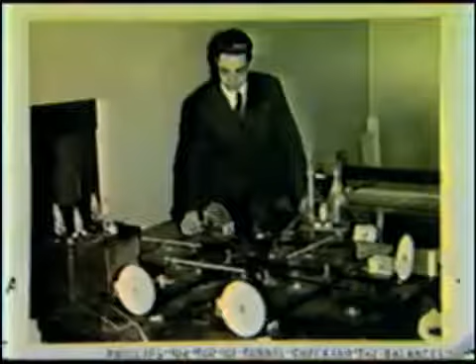The first slide shows me sitting on top of a wind tunnel that was built in conjunction with the Jordan Marsh Junior Aviation League. This is when I was 21 and before I came to Langley. This was a rather unusual wind tunnel. It was intended for testing indoor models, had a test section 5 feet in diameter and an airspeed range of 3 to 5 feet per second.

Now, I'm going to discuss the research by covering 4 different problems that we worked on, and these problems are not necessarily the ones that yielded the most important research results, but I think they serve to illustrate some of the different approaches that are used in solving these problems.

Now, the first work, the case of the unexpected instability, was work that was conducted starting about 1942.

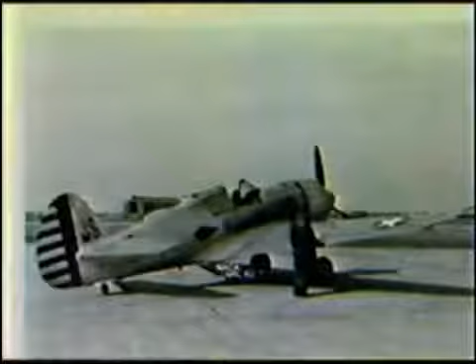The next slide shows this surface installed on a Curtiss XP-42 airplane. You can see the experimental tail surface there. The next slide, please. Now this shows a close-up. You can see, in addition to the tail here, the tab on the trailing edge. This slide shows a plan view of the airplane showing the comparison of the tail with the original tail.

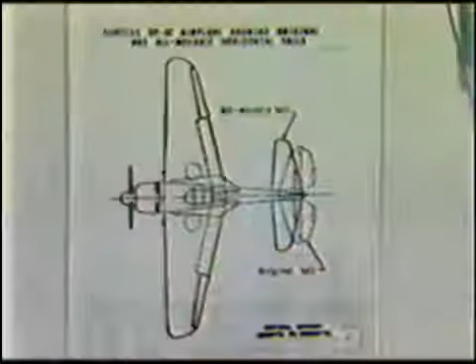Now, this tail was suggested by Bob Gilruth and had a somewhat different concept from the idea suggested by Jones. At that time, fighter airplanes were running into problems in high-speed dives because they would reach speeds where compressibility effects were encountered on the wing, and shock waves would form, which would cause the flow to separate on the wing. Usually this resulted in a large loss of downwash at the tail, and as a result, a large nose-down pitching moment on the airplane. And because these airplanes in dives were at very high dynamic pressure, sometimes the pilot was unable to pull hard enough on the control stick to recover from the dive.

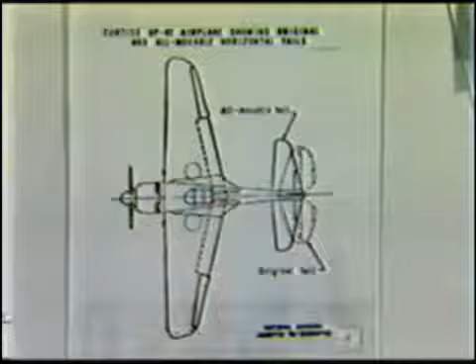So the idea of this tail was to reduce the aerodynamic hinge moments on the surface practically to zero, so that the problem of applying enough control effort would not be encountered. Now, the principle of operation of the tail is shown on this slide.

The tail was pivoted about a point close to the aerodynamic center so that the forces required to deflect it would be small in any case. Then the tail was controlled through a device we call a spring tab, which is this linkage.

This slide shows how this would work. If you pull on the control stick, that first deflects the tab. Then, as the tail moves in response to the aerodynamic forces, the tab again becomes lined up with the surface.

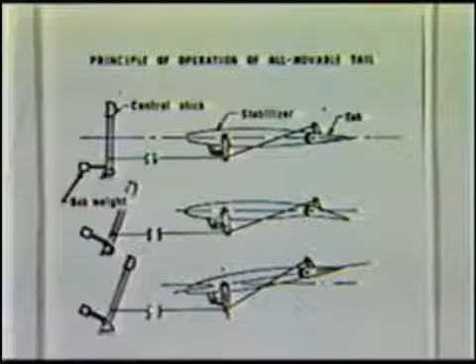Also a spring is inserted between the control linkage and the main part of the tail. The spring is weak enough, however, so that the aerodynamic forces have the main effect in moving the tail. The main purpose of the spring is so the pilot can move the tail around by moving his stick when the airplane is sitting on the ground.

Now, since the spring tab arrangement would reduce the control forces practically to zero, a feel device in the form of a bob weight on the control stick was added. This would give a constant force per G when the pilot made pull-ups and turns, and we had found from previous handling qualities research that this was a desirable type of control feel.

Our chief test pilot, Mel Gough, took this airplane out and made some high-speed taxi runs and short hops into the air. He came back and very vehemently said that this airplane was completely uncontrollable, and under no conditions would he fly it until we made some improvements.

So this was somewhat of a puzzle. We thought that the tail would work reasonably well. We thought the aerodynamic center would be at the quarter chord point, and the tail was pivoted at the 24% chord point so as to give it a small amount of stability.

Well, after thinking about this without coming up with any solutions, I decided to build a model. This wasn't a model of the XP-42 by any means, just a glider model with a rectangular fuselage. The wing was taken from an old rubber-powered model that I had available. However, the tail and the tab linkages and so forth were quite well reproduced. Since I'd had a lot of experience building models, I could build a model like this in about a week.

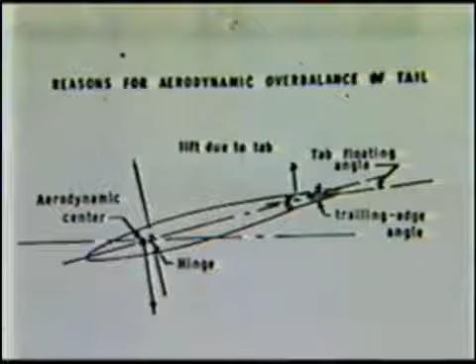First, although we usually consider that the aerodynamic center on an airfoil is at the quarter chord point, it's true that on a finite aspect ratio surface, the aerodynamic center is further forward. Perhaps even some aeronautical engineers today don't realize this.

The other point is that this surface had a finite trailing edge angle. Many airfoils are designed with a cusp-type trailing edge, but when the structural engineer sees this, he fills in the surface back here with lines tangent to the upper and lower surfaces in order to get more thickness for structural strength back at the trailing edge. This had been done on this airfoil.

Now, Bob Jones had previously put out a report which showed that you could reduce the hinge moments on a control surface by using a beveled trailing edge. It was generally known at that time that the trailing edge angle did affect the hinge moments on the control surface. That also occurred on the all-movable tail, and since we had this finite trailing edge angle, that further tended to move the aerodynamic center forward.

Finally, as you can see, when the tail is deflected, the tab tends to float with the relative wind, and the aerodynamic forces generated tend to further deflect the surface. So the combination of these three effects evidently combined to make our tail quite unstable.

Well, this was corrected by gluing strips along the trailing edge. These were strips of wood about a quarter of an inch high on the upper and lower surfaces, right at the trailing edge. This was a fairly common procedure in those days for increasing the hinge moments of a control surface. When this was done, the surface was found to be sufficiently stable so the pilot was able to continue the flight research. Now, the handling qualities were still not completely satisfactory, so it might be of interest to discuss what we learned from these studies of all-movable tails.

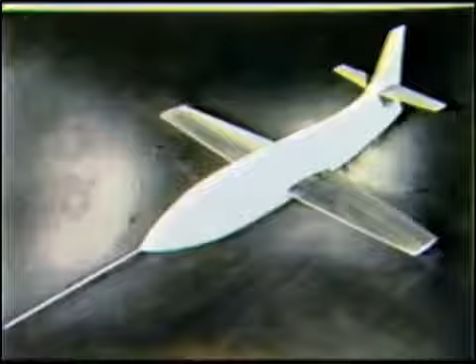Also, a simple longitudinal autopilot was incorporated because we didn't know what pitching moments would be encountered at transonic speeds. This autopilot was simply an accelerometer sensing normal acceleration with a couple of contacts on it. When the acceleration exceeded a range of 4/10 to 8/10 g, these contacts would operate and actuate a slow-moving trim motor, which would run the elevator in the direction to bring the acceleration back into the desired range.

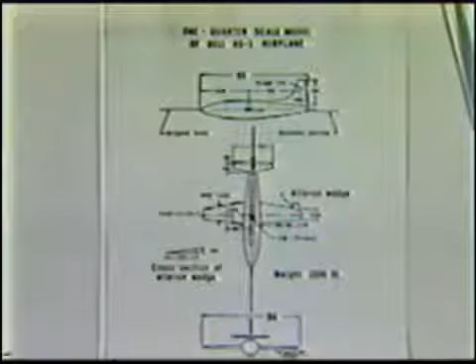Now the next slide shows a 3-view drawing of the model. As you can see, it had... want to move it up, please? Could you move it up, please? Yeah. It had a span of 84 inches, or 7 feet, and the weight was 1,300 pounds. Pretty heavy model for that size.

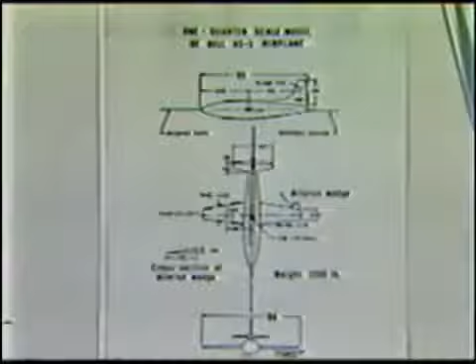Now, when I fly a model airplane, I frequently sight along the trailing edge of the wing to make sure it's not warped before I launch it. Nobody would have suspected that this wing would be warped, since it was machined from solid steel to an accuracy of 0.02 of an inch. However, as a matter of habit, I looked along the trailing edge of the wing, and it was quite apparent to me that this wing was warped, with one side up about 1/4 of an inch compared to the other.

So some more accurate measurements were made and showed that sure enough it was warped. Some small wedges were placed on the trailing edge of the wing, similar to ailerons, to attempt to offset the twist, or the built-in twist of the wing. We did not want the model to roll too fast during the dive because we were studying longitudinal characteristics.

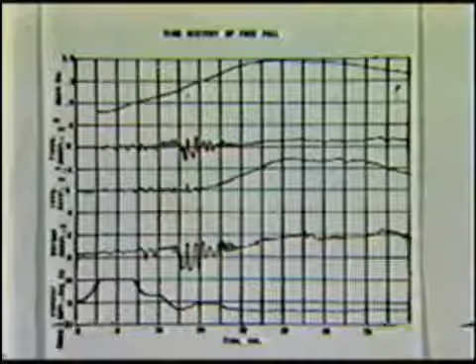Well, the model was dropped, and the time history of the results are shown on the next slide. You can see that the acceleration, the Mach number starts off at about 5/10 and builds up to very nearly 1, and then decreases a little bit towards the end of the dive. This shows the transverse acceleration, the longitudinal acceleration, which shows the buildup of drag at transonic speeds, the normal acceleration, and the elevator angle.

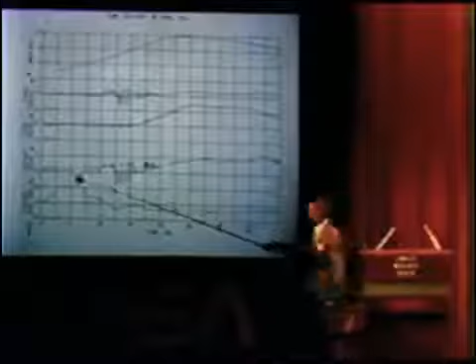Now the acceleration started off less than 4/10 of a g, and as a result, the elevator, as you can see, ran up to its full up deflection, which was 10 degrees. When the acceleration exceeded 8/10 of a g, the elevator started moving down again, as was intended, and it maintained the acceleration in the desired range fairly well.

Towards the end of the drop, however, you can see the elevator was full down. Its maximum downward deflection was 4 degrees, but this was not enough to keep the g from building up, and it built up to about 2g.

Now, a rather unusual thing happened also. We did not measure the rolling velocity, but the people tracking the model with a phototheodolite could see it rolling by the flashing of light on the wings. However, when we got to about this point, near the maximum Mach number, the model stopped rolling, and due to the 2g acceleration, it performed a gradual pullout. So it flew away far from the desired impact point at Plum Tree Island, and flew way over to the swamps of Poquoson and crashed down there.

Now, it's not considered very good to have a 1,300-pound model at Mach 1 crashing down in a populated area.

However, apparently no one knew about this, no one was hurt, so far as I know, no attempt was ever made to recover the model, and it's probably still sitting 20 feet deep in the mud somewhere around the swamps of Poquoson. Very little was ever said about this.

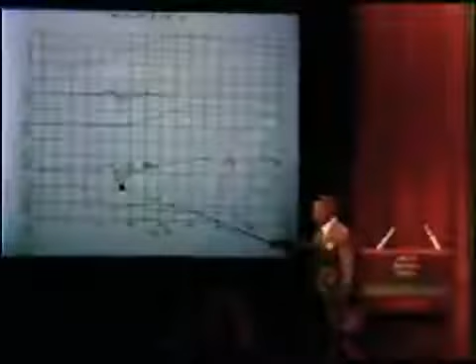Well, I felt, because of the fact that the model was rolling and also the very heavy weight of the model, there were probably some inertial effects involved. So I started to think about how to investigate this problem.

Now, I must admit that it never occurred to me that the conventional airplane stability equations could be used to study this problem. Probably the reason for this was that when I studied stability at MIT, the professor first introduced the longitudinal equations and then the lateral equations, and these were studied as separate problems, whereas in this case we had a combination of longitudinal and lateral motion.

At MIT, however, I had a course called Introduction to Aeronautical Dynamics by Professor Rauscher, in which he went back to first principles and introduced us to a set of equations called Euler's dynamical equations for the rotation of a rigid body. And these equations are shown on this slide.

Now, since these equations applied to combine the longitudinal and lateral motions, I thought this would be a good way to start investigating the problem.

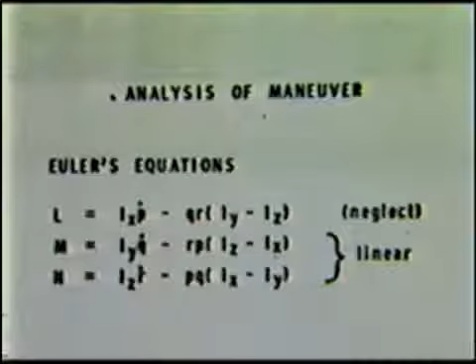Now, I felt that in this maneuver, the airplane was rolling at approximately a constant rate, so the rolling acceleration would be zero. Also, Q and R would be small, so the product would be negligible, and so this entire first equation could be neglected.

The second two equations, we see this product RP and PQ involving the rolling velocity. However, if the rolling velocity is constant, then the equations become linear, involving Q and R. Now, this was fine because I knew how to solve linear equations.

The other point you can see is that the first two terms are simply the equations of a body doing a single degree of freedom. The pitching moment equation represents an oscillation in pitch, and this one represents a yawing oscillation. The effect of these terms is to couple those two oscillations.

So the way I approached this problem was to consider a vehicle having an oscillation in pitch and an oscillation in yaw, which were coupled by those coupling terms, hence the term inertial coupling that was applied to this work.

Well, this seems like a straightforward approach. However, I did run into some conceptual difficulties. It appeared that when the pitching and yawing oscillations were studied, it was probably more convenient to use fixed axes, whereas Euler's equations apply to angular velocities about body axes.

Omega sub theta is defined as the ratio of the pitch natural frequency to the rolling velocity, or the rolling frequency. Similarly, omega sub psi is the ratio of the yaw frequency to the roll frequency.

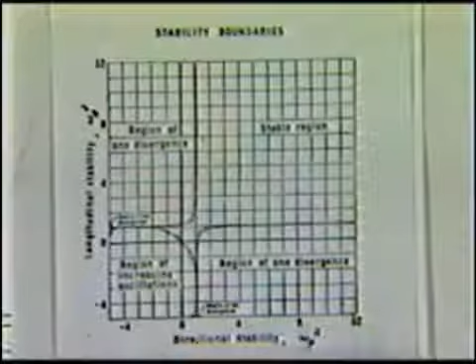Normally, if an airplane would have some pitch and yaw frequency, we would be located somewhere in this chart. And as the rolling velocity increases, since the rolling velocity is in the denominator, you would follow a set of conditions approaching the origin.

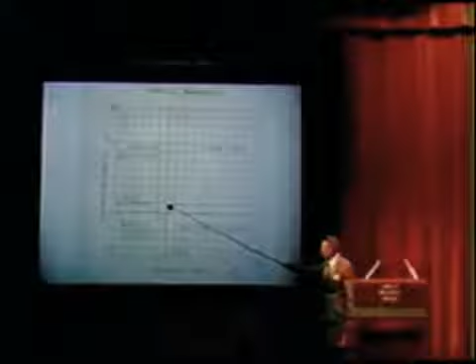Now, if the pitch and yaw frequencies are approximately equal, the airplane, or the conditions, would go on this path, which would remain in the stable region all the way up to infinite rolling velocity.

However, if the pitch and yaw frequencies were different, then it's possible that the conditions would cross over the boundary into this region of divergence.

It appeared that that was what happened on the X1 model. That is, we knew in that case that the directional stability was very much larger than the longitudinal stability, so the conditions would be somewhere in this region, and as the rolling velocity increased, it would pass over into this divergent region.

Evidently, when that happened, the airplane simply diverged until it reached the stall, and then the stability increased to the point that it was batted back in the other direction, resulting in an oscillation of several cycles, as you saw.

Well, when I wrote a report on this, I pointed out that although this problem had not been encountered on full-scale airplanes up to that point, it would very likely be encountered on fighter airplanes, which were then on the drawing boards, because these airplanes had most of their weight in the fuselages and short wingspan, high rolling velocities—all conditions which would tend to lead to this problem.

And as you heard, this was actually encountered, and as a result, this report got quite a bit of attention.

Well, I'd next like to go to what I'd call the case of the unknown concept, which is gust alleviation. Let's see, I really didn't mean to put that slide up yet, but that's okay.

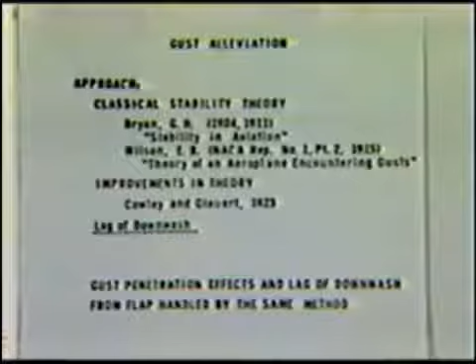Autopilots had been pretty well perfected during World War II, and at that time, pitch dampers and yaw dampers were just coming into use. However, these were conceptually so simple, it hardly seemed worthwhile to do any research on them.

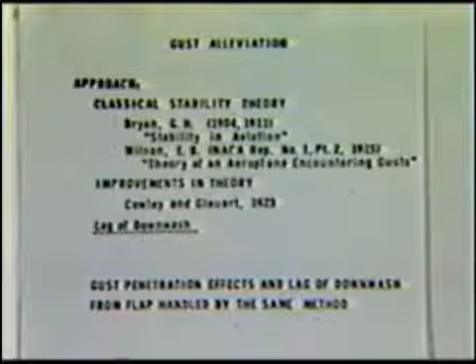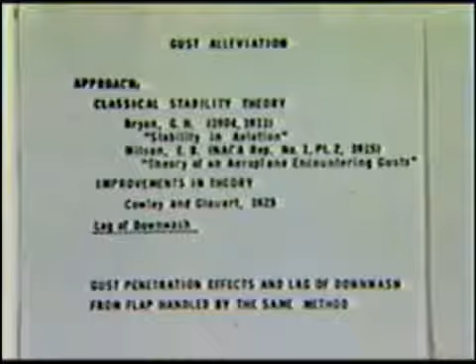That left about three fields where we thought there would be worthwhile research. One was the study of guided missiles. The other was what we call command control systems, where the pilot's input is applied through the automatic control system.

This is what we sometimes call today active control systems. And finally, the subject of gust alleviation.

Now, the guided missile work had been pretty much ruled out because Dr. Dryden, when he was director, said that NACA shouldn't work on guided missiles unless they were requested by the military services.

That left the command control systems and gust alleviation, and we did research in both those areas. I'd like to talk about the gust alleviation because I was more directly involved with that.

Now, at that point, a number of attempts had been made to build gust-alleviated airplanes, but these had all been notably unsuccessful. And I concluded the reason for this was that these were all attempts to build airplanes by inventors who had not bothered to do any theoretical analysis of their systems before they were tried.

And as a result, I thought the best approach to this problem would be to first make a theoretical analysis.

Now, this was something I could do quite easily on the basis of my background, because I was involved primarily with the longitudinal equations.

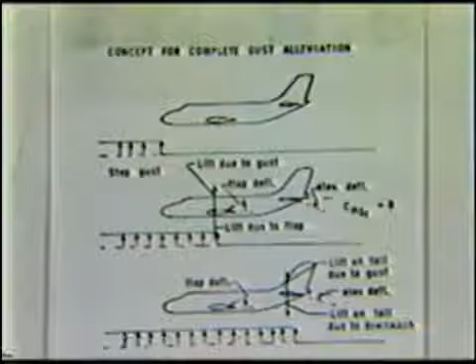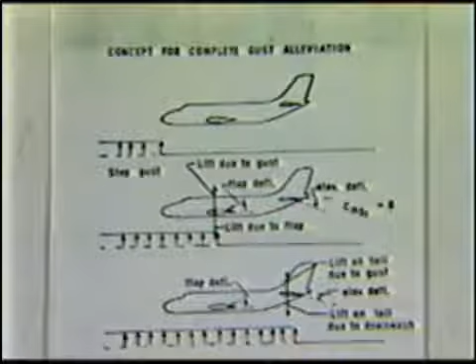Now, this was in terms of a mathematical formula, but after thinking about this for a while, I could see that it actually represented a very simple physical concept. What's going on is, assume we have an airplane approaching a step gust. When the gust hits the wing, it's necessary to move the flap up to produce a lift just opposite to the lift generated by the gust on the wing. However, when you do this, it causes a pitching moment on the airplane. This pitching moment can be offset by simultaneously deflecting the elevator, so the pitching moment is also zero.

Then when the gust reaches the tail, that produces a lift on the tail. Flap and elevator are still deflected. In order to offset that lift on the tail, one possibility is that the downwash from the flap would just offset that lift on the tail, since it would reach there the same instant as the gust. Now, this is somewhat unfortunate in that you can see that when the flaps are deflected up, it usually produces an upwash, whereas what we need is a downwash.

However, we actually considered various possibilities and decided to build an airplane in which this principle would be utilized. Another way to do it would be to then subsequently deflect the elevator an additional amount, to offset this lift on the tail due to the gust. I'll explain in a minute why that was not done.

Now, the next slide shows the airplane that we modified to include a gust alleviation system. This is a Beech 18 airplane, also known by the military designation C-45, and you still see a number of these flying around as executive airplanes. You can see we installed a vane on the nose to sense the gusts.

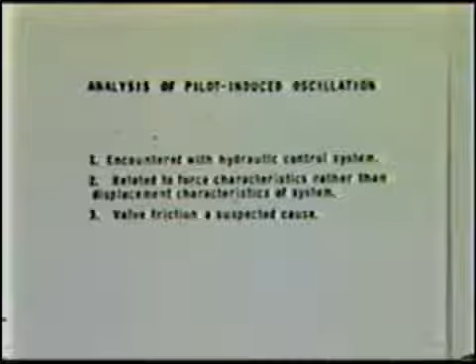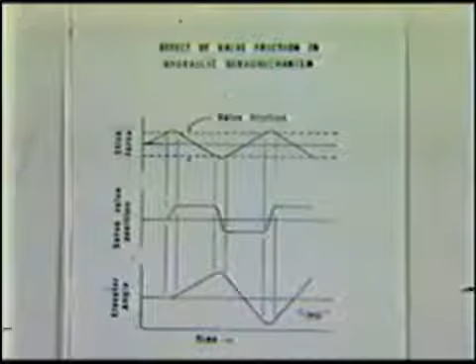The next slide shows how this valve friction might influence the control characteristics. Suppose the pilot starts to move the control stick. He pulls on the stick, but nothing happens until he breaks through the valve friction. Then the valve is deflected, and the elevator starts to move at a constant rate. The pilot may decide he doesn't want the elevator to move further, so he pushes in the other direction, but the elevator does not start to reverse until he breaks through the valve friction in the other direction. Then the control moves in the other direction. As you can see from this chart, the control force is exactly 90 degrees out of phase with the resulting response. We knew from previous work that we would really like the control force to be in phase with the elevator deflection. So this was thought to be a possible source of these oscillations.

However, the problem was to convince anybody of it. The thing was that if you sat in the cockpit in an airplane with a hydraulic system and moved the control stick, it moved just as smooth as could be. You couldn't see anything wrong, you couldn't feel anything wrong.

I thought, this is my idea that came to me as to how we might demonstrate this problem. This is called the frequency response method. We would first measure the stick forces and elevator deflections with sinusoidal inputs of various frequencies and amplitudes. I should have mentioned, we had an airplane that we'd obtained from the Navy with a hydraulic system installed for experimental work. So we could run these measurements, then calculate the pitching response of the airplane to sinusoidal elevator inputs.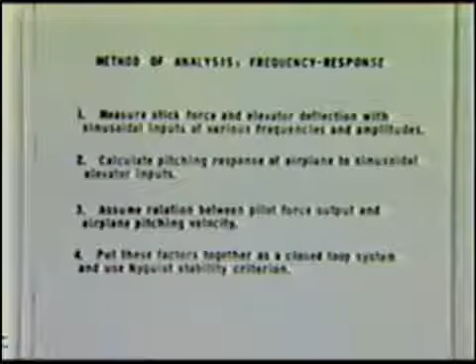Then third, we would assume a relation between the pilot force output and the airplane pitching velocity. In other words, we'd assume a pilot transfer function. And finally, put all these factors together as a closed-loop system and use the Nyquist stability criterion.

I mentioned the reason pitching response was used, that is pitching velocity, was that this is the thing with the least lag. In other words, when the pilot deflects the stick, the pitching response occurs first, then the angle of attack, and then the pitch angle. So we figured if we showed an oscillation when the pilot sensed pitching velocity, this would be the most convincing type of demonstration. And also we knew the pilot could sense pitching velocity because the pilot has an inner ear mechanism which enables him to sense pitching velocity.

Well, when this was done, sure enough, it showed we had instability.

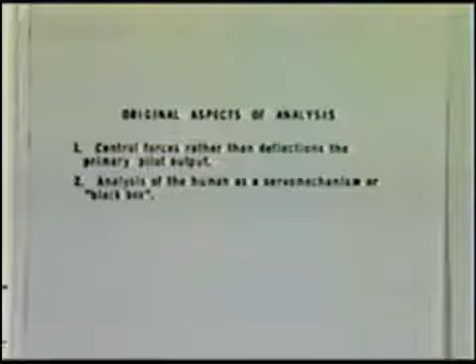Now, this might seem like a very conventional thing to do nowadays, so I might point out what are the original aspects of this analysis back in those days. First, control forces rather than deflections were considered as the primary pilot output. Almost all the work on servo mechanisms to that day had been done assuming a control deflection was the output. Second, the analysis of the human as a servo mechanism or black box. Some work had been done by that time on human pilot response. A man named Tustin during World War II used pilot transfer functions to design anti-aircraft gun directors. But very little had been done using these techniques on airplanes, and in particular the use of the pilot's force output had not been considered.

Now, in addition to doing this analytically, we set up a demonstration so the pilots could feel it and convince themselves that they had a tendency to pilot-induced oscillations.

This is what we call an early simulator. In those days, we didn't have analog computers, didn't have any simulators. However, we hooked up a slide projector on a frictionless pivot to the elevator by means of a spring, so that when the elevator was moved, this slide projector would oscillate with a motion very similar to the pitching response of the airplane, pitching velocity response.

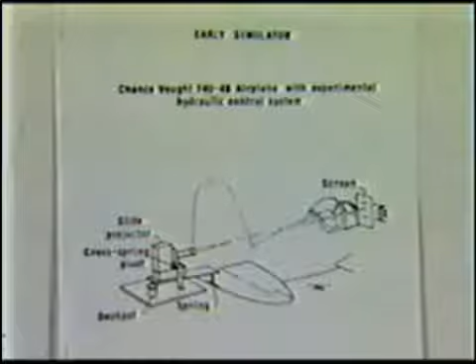Then the light from the projector was projected to a screen next to the pilot cockpit, so we had a fairly sensitive movement of the light spot to the pilot's control input. As I mentioned, when the pilot just sits in the cockpit and moves the stick, he can't feel anything wrong at all. But when he tries to maneuver this light spot, he immediately recognizes the tendency to pilot-induced oscillations.

Today, of course, we have many simulators which can be used for studies of this type. Also, when every new airplane is built, the control system is laid out on the floor in a mock-up called an iron bird, and this might be called the forerunner of the iron bird. Today, they set up the control surfaces, usually with simulated inertia and control loading devices, and the motion of these simulated surfaces is fed into a computer, which calculates the resulting motion of the cockpit instruments, so that many problems of this type can be solved before the airplane actually is flown.

One pitfall of using simulators or iron birds is that the display might not be sensitive enough to detect all the problems. We know that a human pilot, sensing by seat of the pants, can detect an oscillation of about 2,000ths of a G. If we give him a dial-type instrument display, he may not detect accelerations anywhere near this small. So for these types of studies, it's very desirable to amplify the display, as we did here, where about 1 G corresponded to a foot deflection of the pointer.

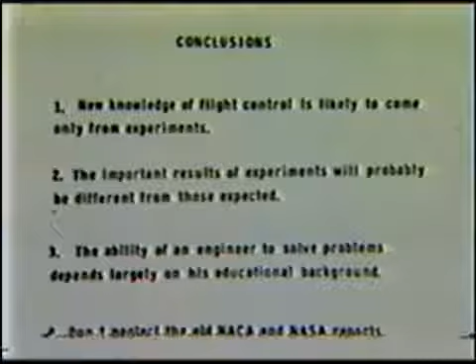Third, the ability of an engineer to solve problems depends largely on his educational background. This was brought out by John Houbolt yesterday, and it's certainly true in my case that it was definitely necessary to get up to date on the theoretical techniques and so forth before I could attempt to solve any of these problems.

Some work on a concept he called the all-movable tail surface: instead of using a surface with a fixed section and a movable flap, he would hinge the entire surface, and a geared tab was attached to the trailing edge. By adjusting the position of the hinge line and setting the correct gearing between the tab and the main surface, it was possible to adjust the hinge moments as desired. Also, if the hinge line were behind the aerodynamic center of the tail, the tail would tend to float against the relative wind, giving more stability to the airplane than a fixed surface.

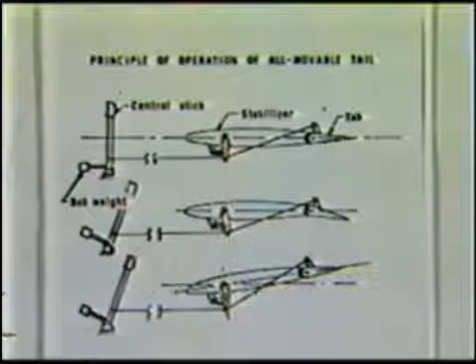A spring is inserted between the control linkage and the main part of the tail. The spring is weak enough that aerodynamic forces have the main effect in moving the tail. Its main purpose is so the pilot can move the tail by moving his stick when the airplane is sitting on the ground.

Since the spring tab arrangement would reduce control forces practically to zero, a feel device in the form of a bob weight on the control stick was added. This would give a constant force per G during pull-ups and turns, which previous handling qualities research had shown to be a desirable type of control feel.

Our chief test pilot, Mel Gough, took this airplane out and made some high-speed taxi runs and short hops into the air. He came back and very vehemently said that this airplane was completely uncontrollable, and under no conditions would he fly it until we made some improvements.

So this was somewhat of a puzzle. We thought that the tail would work reasonably well, and we thought the aerodynamic center would be set up here.

A couple of months ago, I gave a talk entitled Benjamin Franklin's Contributions to Fireplace Design. I think we could all learn a good deal more about the scientific method from Benjamin Franklin than from listening to me, also about entertaining writing and persuasive argument. However, since I've been asked to talk about myself, I'll attempt to do that.

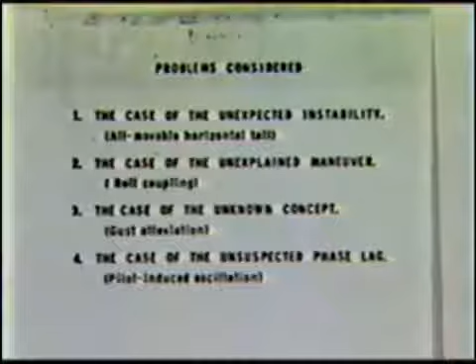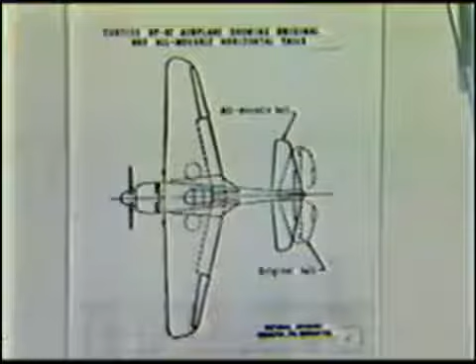At that time, fighter airplanes were running into problems in high-speed dives because they would reach speeds where compressibility effects were encountered on the wing, and shock waves would form, causing the flow to separate. Usually this resulted in a large loss of downwash at the tail, and as a result, a large nose-down pitching moment on the airplane. Because these airplanes in dives were at very high dynamic pressure, sometimes the pilot was unable to pull hard enough on the control stick to recover from the dive. So the idea of this tail was to reduce the aerodynamic hinge moments on the surface practically to zero, so that the problem of applying enough control effort would not be encountered.